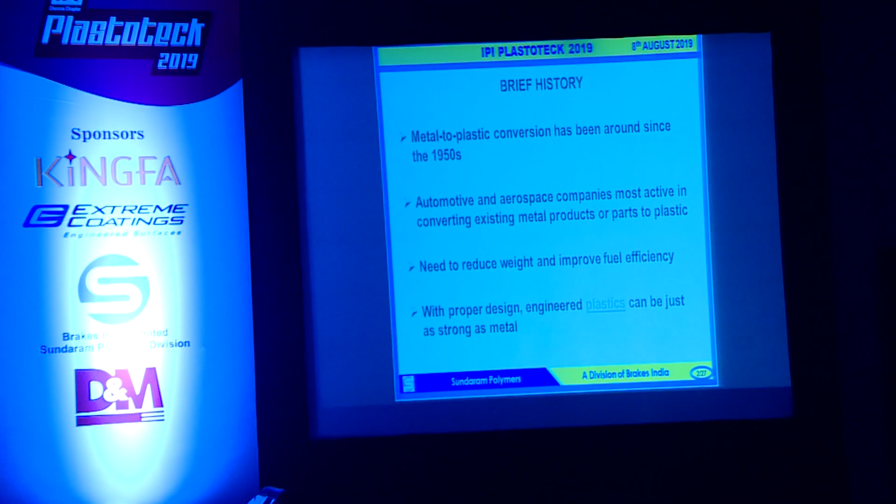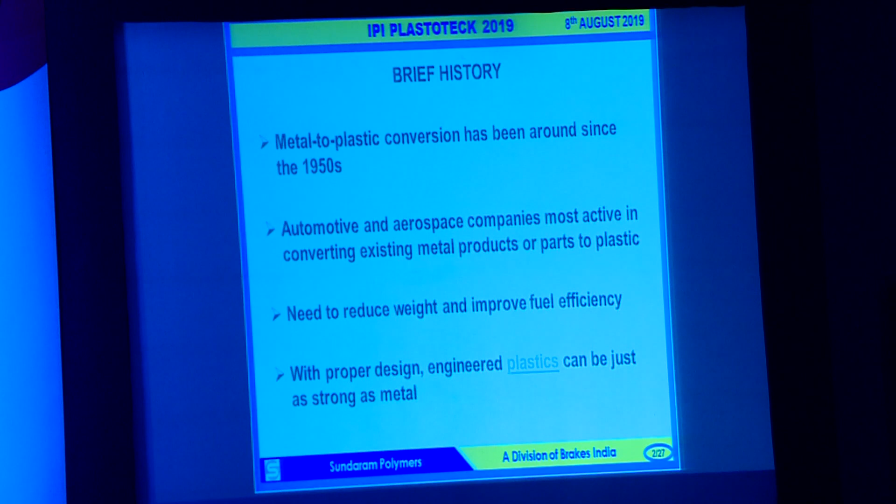A brief history. Metal to plastics conversion started quite a long time back, in the 1950s. The focus was mainly from automotive and aerospace companies. Aerospace companies use as much as about 25 to 30% of metal to plastic components, and they were the most active in converting metal products to plastics. The main drivers were to reduce weight and to improve fuel efficiency.

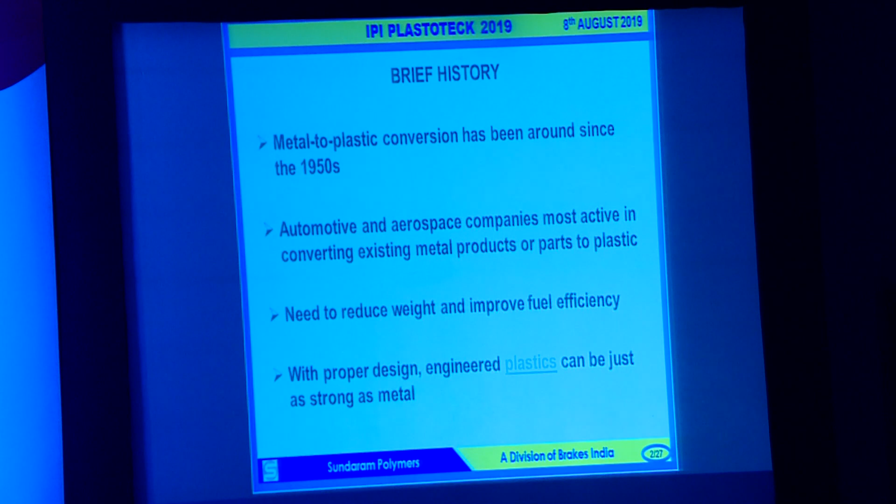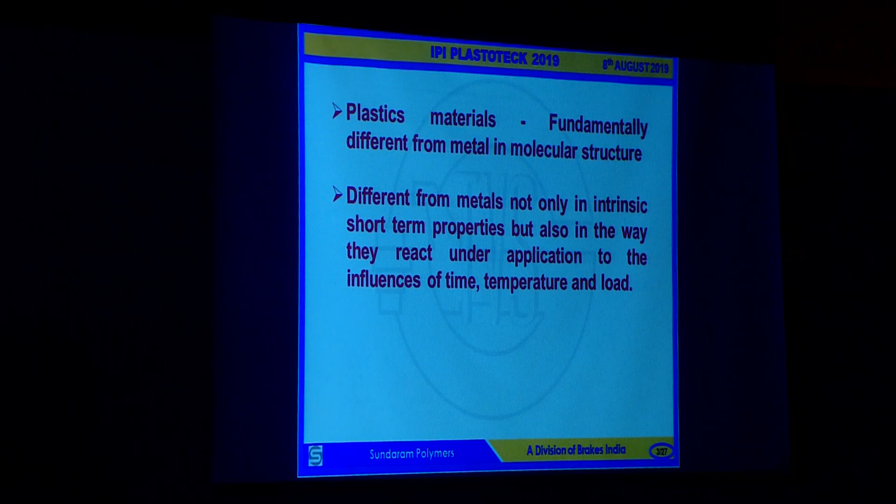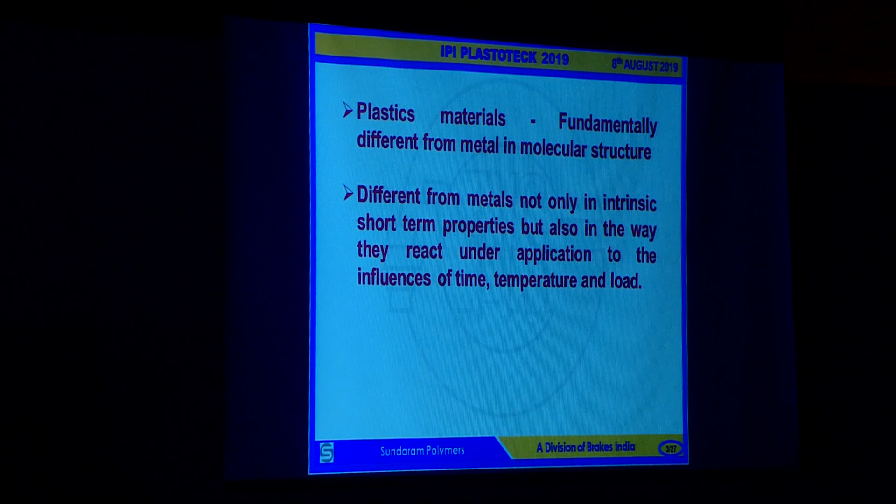With proper design and material selection, engineered plastics can be made to work as strong as metal. One fundamental thing that we need to understand before we take up this metal to plastics is that plastics are basically different from metal in terms of the molecular structure. You can't have an apple-to-apple comparison between metal and plastic. They're basically two different materials. This is something that we need to fundamentally understand before we go into any conversion.

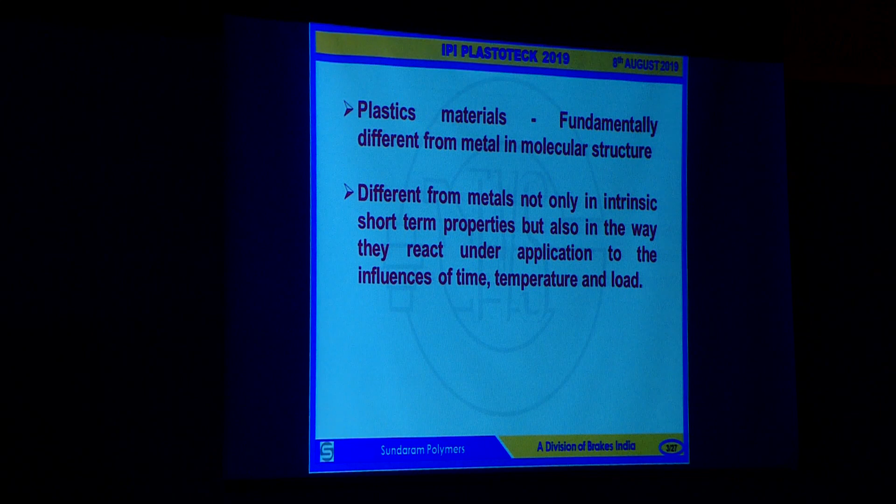And plastics differ from metals not only in the short-term properties, but also in the way they react under applications to influences of time, temperature, and load. It's not that they are inert for a long period of time, for long temperature cycles and for long loading cycles.

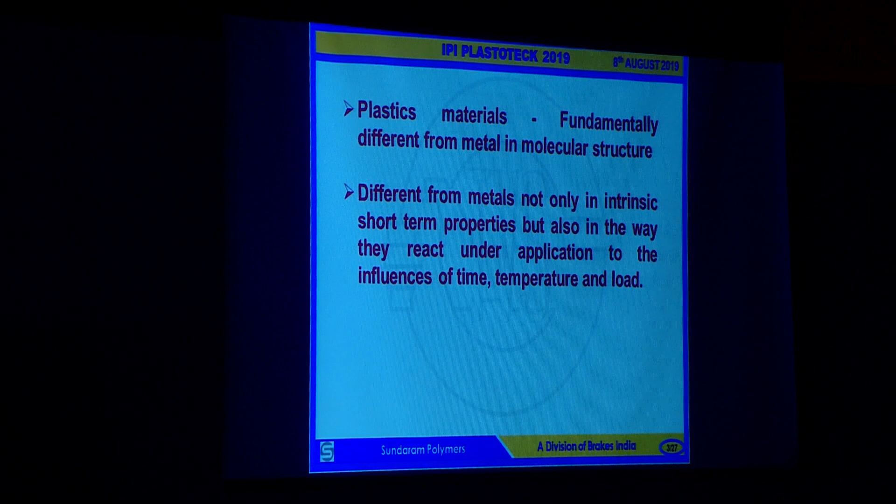The typical benefits you would have from such replacements: the foremost that people look for is weight reduction, because basically all plastics have lower densities compared to metals. Most of the plastics are well below 2, while metals start with aluminum at 2.7 and go up to steels at about 8. Fewer assembly operations can be achieved. Secondary finishing processes can be reduced substantially. Total system cost can be reduced.

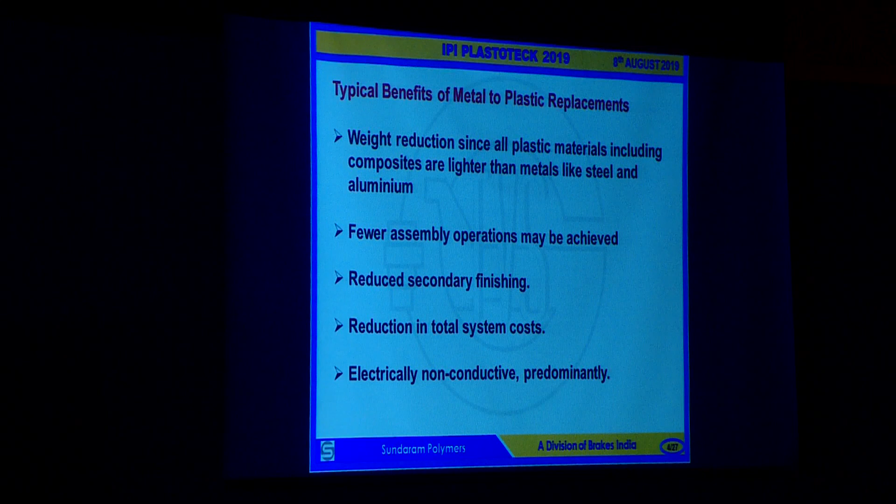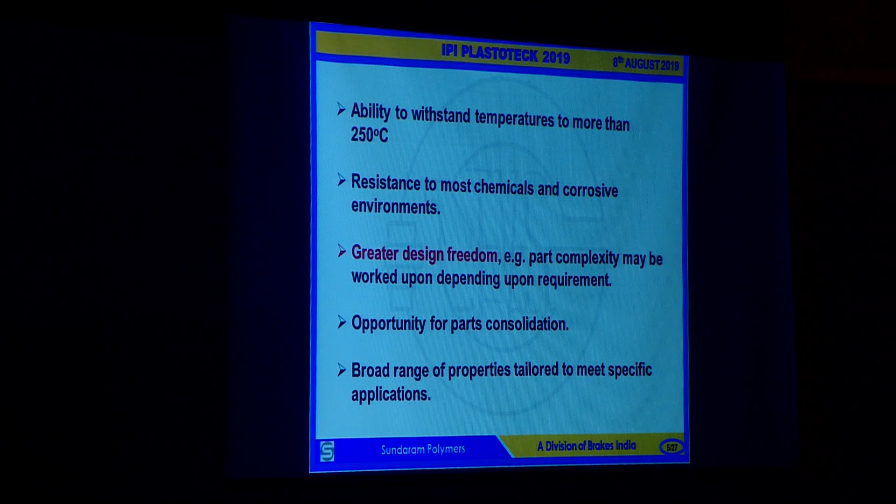Basically, plastics are electrically non-conductive. We have today plastics which can resist up to 250 degrees centigrade, which is well above the normal working temperature in an automotive application. And resistance to most chemicals and corrosive environments. We have greater design freedom with plastics. The part complexity can be designed depending on the requirements.

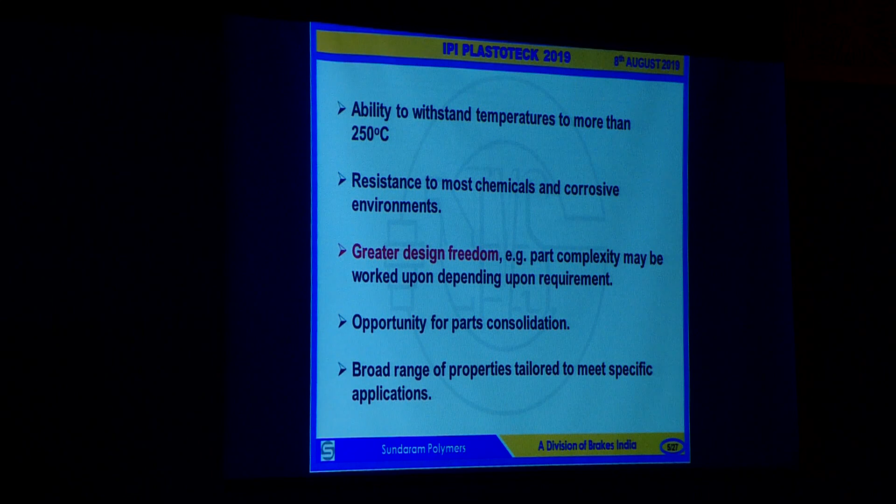Opportunities for parts consolidation: you may have multiple child parts in a metal assembly. That can be consolidated; we can reduce the number of child parts in a plastic assembly. With the wide variety of plastic materials available today in the market, you can have a very broad range of properties which can be tailor-made to suit specific requirements.

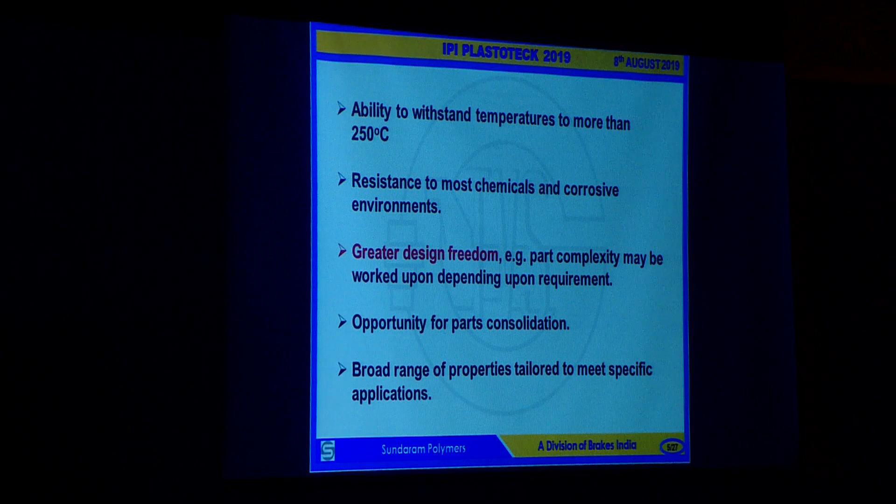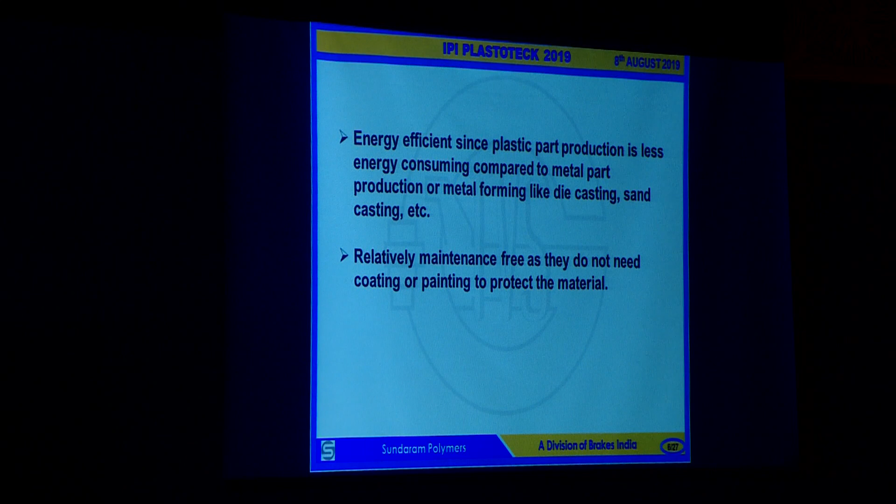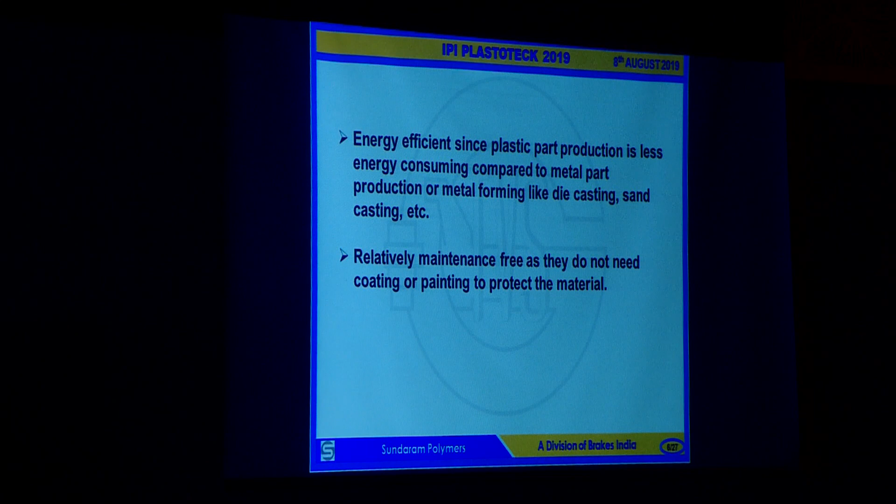Plastic processing is considered to be much more energy efficient compared to metal part production such as die casting or sand casting. In terms of maintenance, they have relatively very low maintenance costs. They do not require any coating, painting, etc. And today engineered colored plastics are playing a very vital role in automotive interiors, where they are replacing many metal parts which are painted.

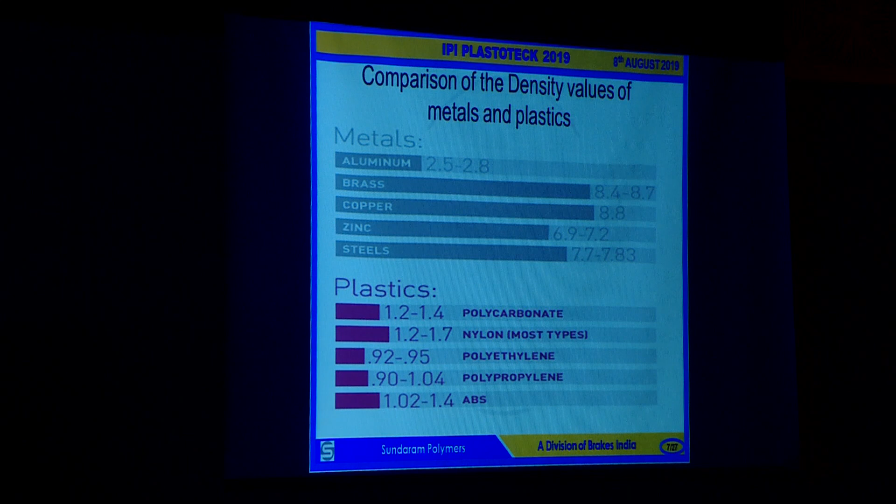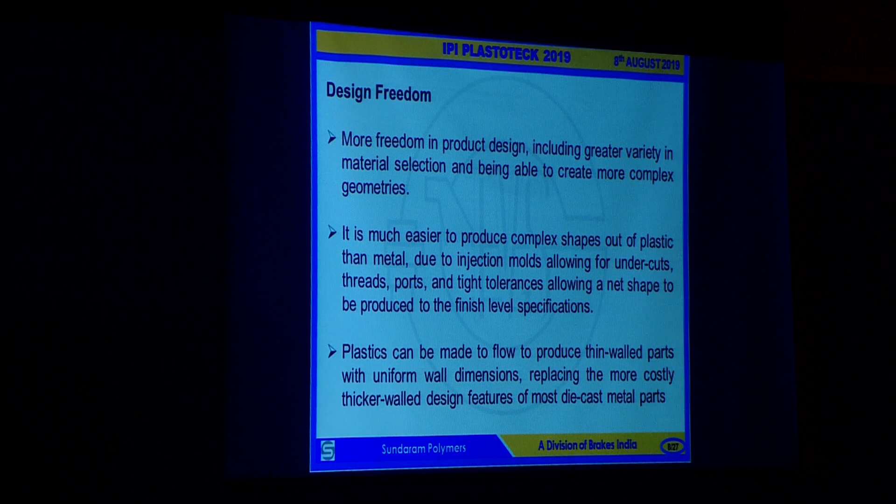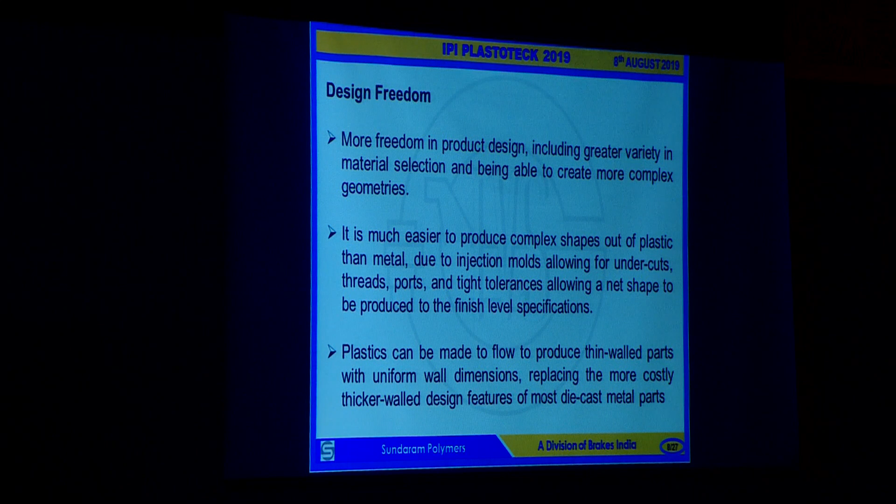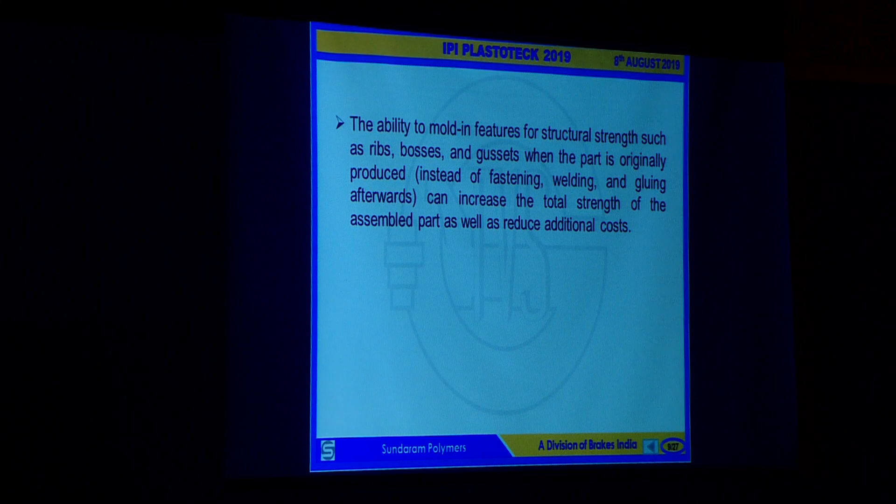Flow characteristics can be monitored and modified in such a way that you can have very low wall thickness products. And when you consolidate and make a plastic part replacement, you can have inbuilt structural strength for the plastic part by provision of ribs, bosses, and gussets, instead of having a very solid thick part. This can avoid many other processes such as fastening, welding or gluing, which are normally seen with the metal part, and this can increase the total strength of the full assembly.

The current trends in conversion mostly focus on reducing weight. It's one of the major ones, improving the strength, better corrosion resistance, consolidating multiple parts into one single plastic part, and mainly achieving the same tight tolerances with fewer secondary operations.

And the overall estimate is about 25 to 50% reduction, because otherwise the conversion really doesn't work. Customers are not happy, OEMs would not be happy. They would require fairly good cost savings. And this will be about 25 to 50% cost reduction in the plastic part.

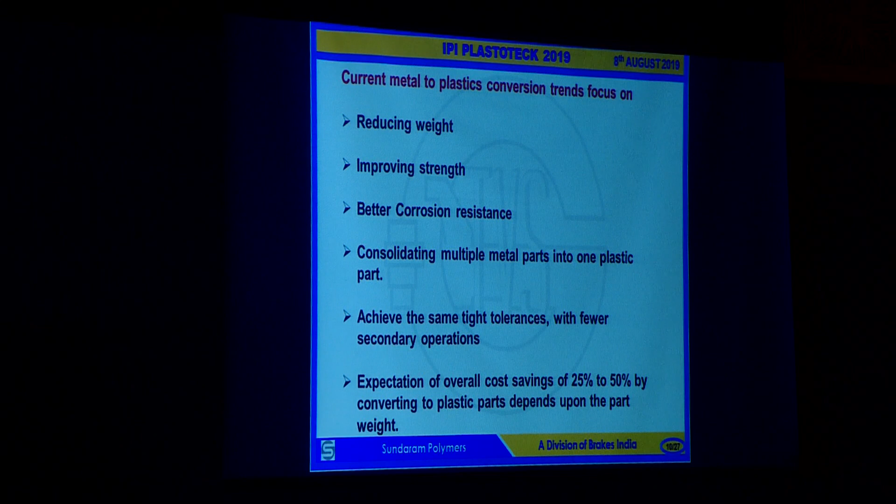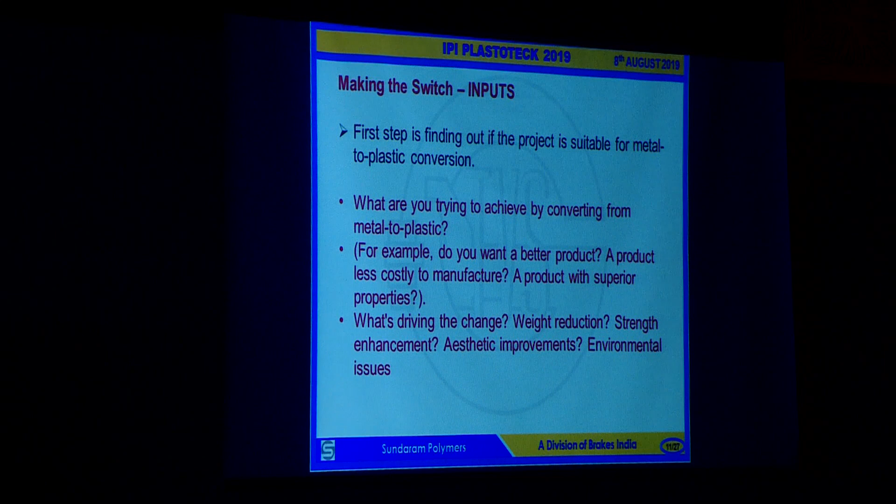When you do a switch, when you do a conversion from metal to plastic, what factors would you look into? First of all, you have to evaluate whether it's really viable, whether it's really suitable for going into such a conversion. So what do you achieve by doing this? It's very difficult to blindly go into any metal to plastic conversion and then finally come back and say, no, it's not workable. So you should look at things like whether you want a better part, which is less costly to manufacture, with some more superior characteristics, added advantages over the conventional metal.

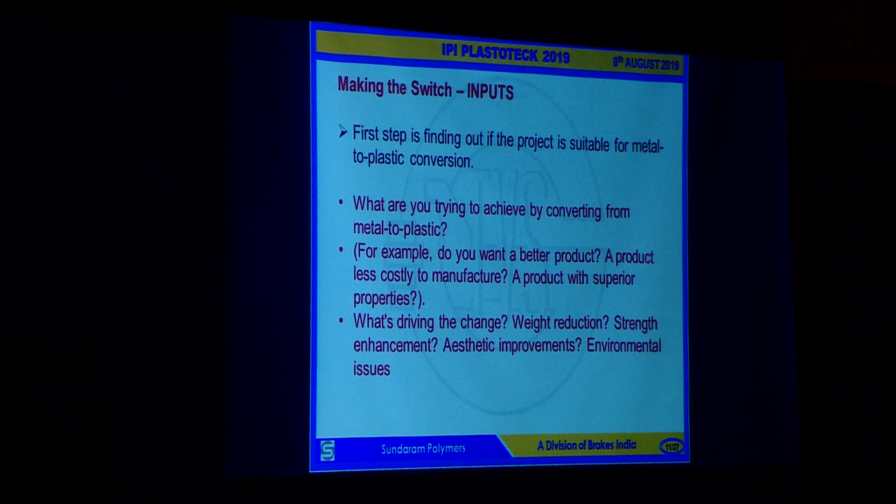What are the change drivers: weight, strength, aesthetics, or environmental issues? These are some of the driving factors for the change which need to be considered. We also need to look at the end-use applications, environmental conditions, and last but not the least, the cost benefit, the economic feasibility of conversion. Do a cost benefit analysis for understanding whether it's really beneficial to change over to a plastic.

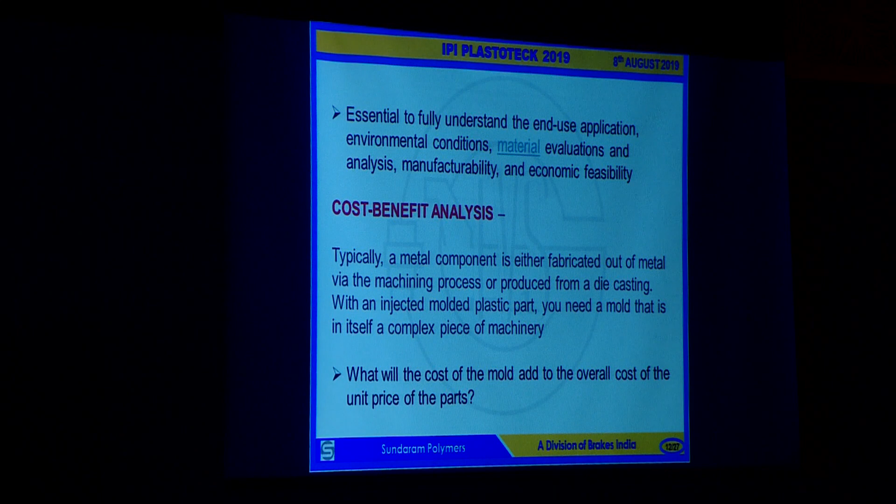One is the material you use, and then the production process. If you do injection molding, you do require a mold. It could be a simple mold, it could be a complex mold, depending on the part geometry. And also you need the machinery. This is also expensive. Will it add to the overall cost of the plastic part? Plastic material prices sometimes can go haywire, so we need to factor that in also.

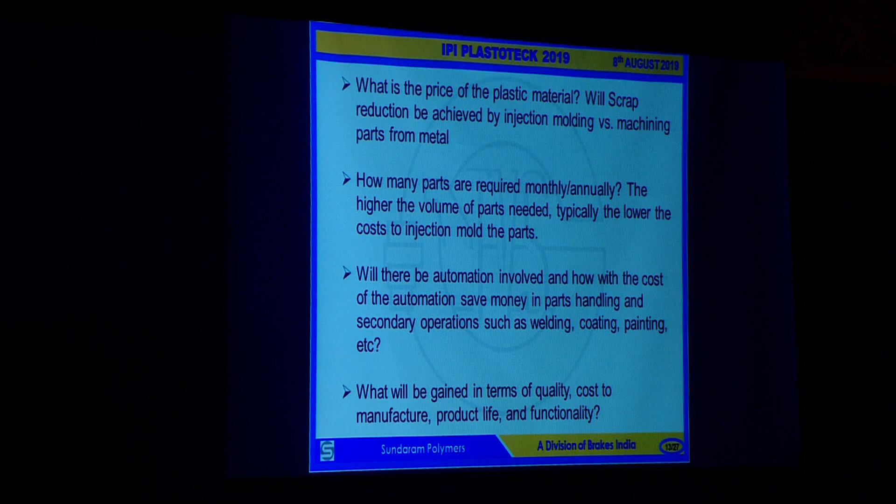How much scrap will you save if you do a metal to plastic conversion? Is it by a cold feed system or a hot runner system? Can you save on the feed system cost also, depending on the plastic you choose? The volumes: very small volumes really do not give you a good value addition. What sort of volumes are you looking at?

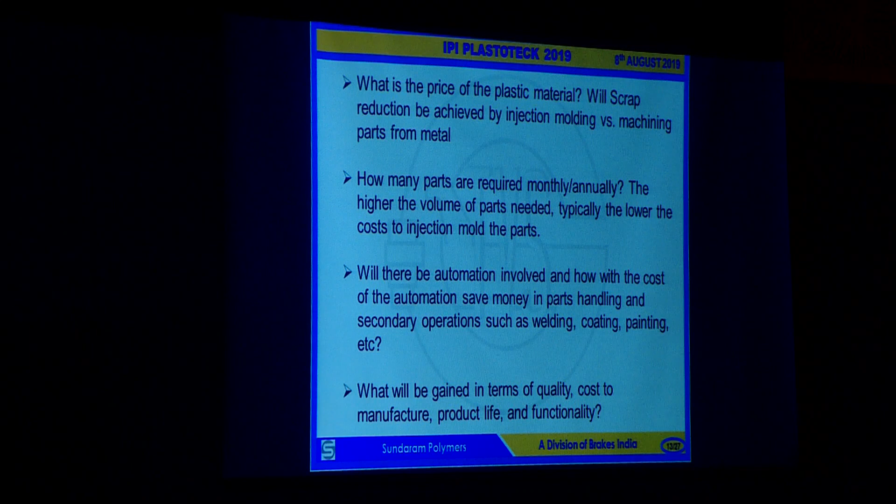Another factor which people really look at today is how the process can be automated. Plastic molding is a very fast process with cycle times of less than a minute. So how can you automate the entire system so that you have better cost advantage? And in terms of overall quality, cost to manufacture, product life, and functionality, what is the total gain that you get from converting from metal to plastic?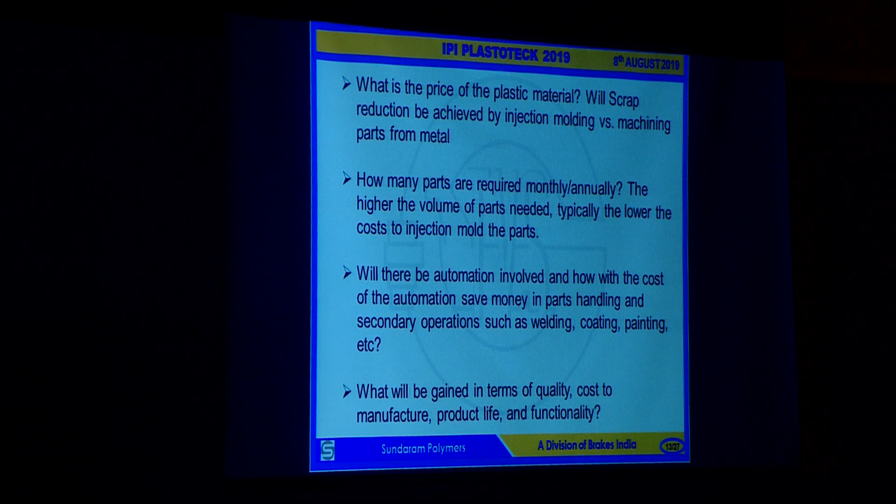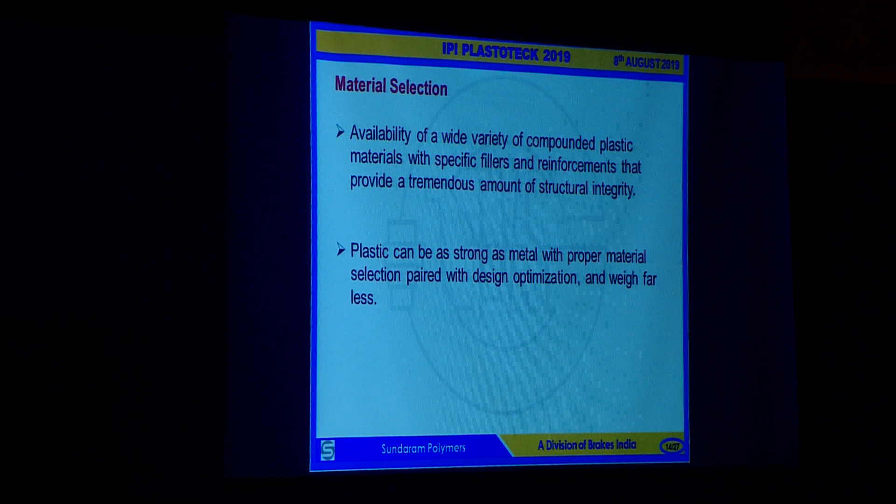In terms of material selection, which is one of the key important aspects of this conversion process: today you have a wide variety of compounds, you have plain polymers, you have polymers from the reactor, polymers which can be compounded with specific fillers, reinforcements, additives. All this can give you a great amount of structural integrity in the plastic part.

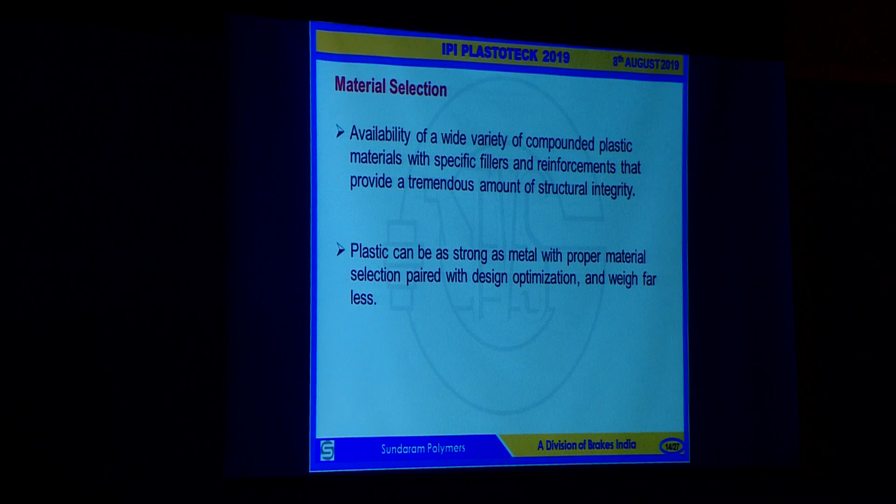So choosing the right plastic also takes some amount of time, a lot of study, a lot of deep insight into understanding the properties of the plastic, understanding their long-term behavior, and you have to choose the right plastic to make it happen.

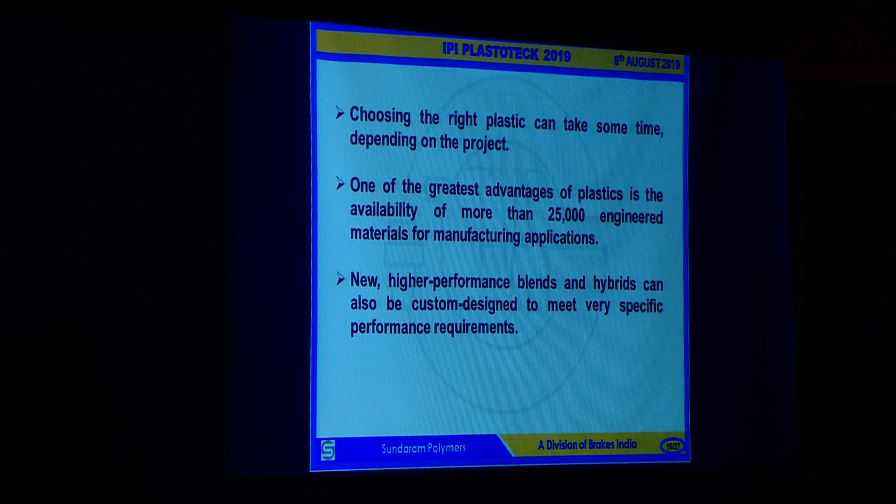And today, from the plastic library, you have more than 25 to 30,000 engineered polymers, which consist of unfilled, filled, and modified polymers. So you have a wide range of materials based on their temperature, continuous use temperature, load-bearing characteristics, etc. to choose from. And you also have a lot of polymer alloys. Polymer alloys are gaining a lot of ground today in metal replacement. And these polymer alloys can be tailor-made to suit the requirements of the part.

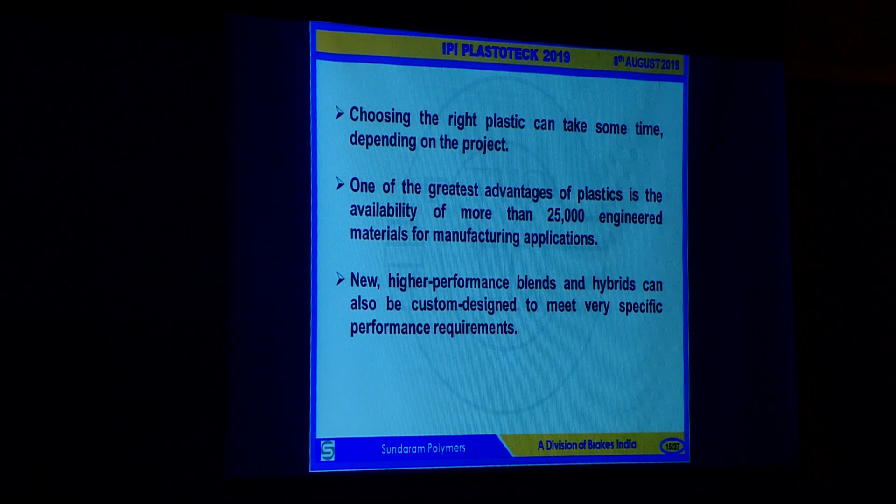Key considerations would include whether you require a crystalline or amorphous polymer, depending on the type of application, chemical resistance, impact, flow, ease of processing. What type of additives would you require to make the plastic work as a suitable replacement? It should have high strength, stiffness, temperature performance, appearance, and also be easy for packaging, and last but not the least, cost.

The plastic should also be easy to incorporate fillers like carbon or stainless steel fillers, specifically for conductive or EMI shielding applications. For friction and wear properties, you can use specific lubricants which can improve the wear characteristics.

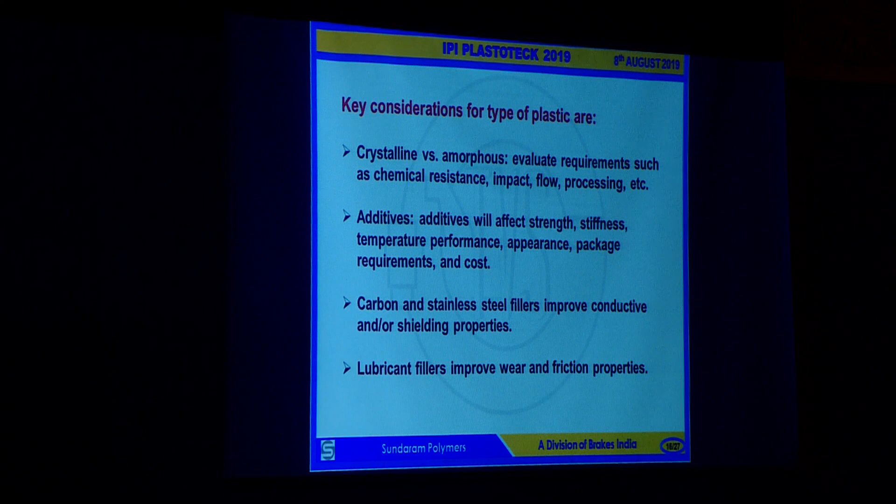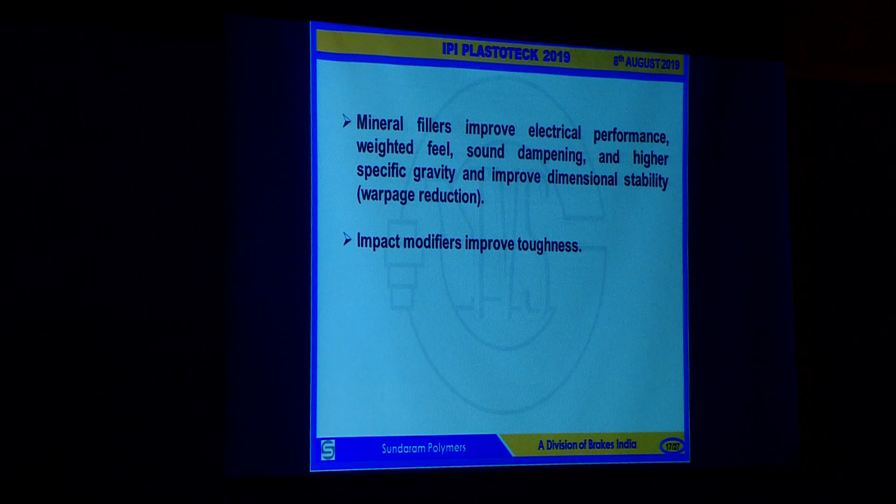Most of you would know that mineral fillers are normally added to reduce cost. But they can also improve electrical performance, weighted feel, sound dampening, and improve dimensional warpage reduction, etc. Rubbers or elastomers would improve the toughness of the material.

The design of the plastic is a chapter by itself. In the time provided I would not be able to discuss too much on that, but I'll just touch upon this. The design engineer plays a very pivotal role in designing the plastic part. So he must be able to accurately predict what would be the real environment in which the plastic part would be subjected to.

So chemical exposure, temperature resistance, and also he should have a fairly good idea on understanding what would be the worst case scenarios, under what extreme conditions the plastic part would be subjected. And today we have many softwares, FEM tools which can clearly help us to understand what would be the ability of the plastic to meet the requirement without even any major investment in tooling or even material.

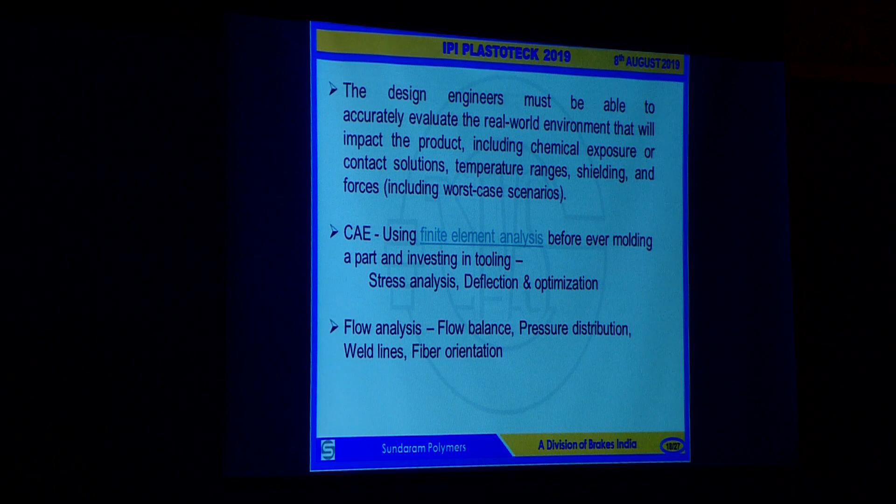Ultimately, it requires a very close collaborative approach between a part engineer, a materials engineer, mold designer, and the molder to make a successful metal to plastic conversion. A silo approach would be a total failure in this case. I can very clearly tell you this. It would require a very, very close collaborative and very integrated approach to achieve this.

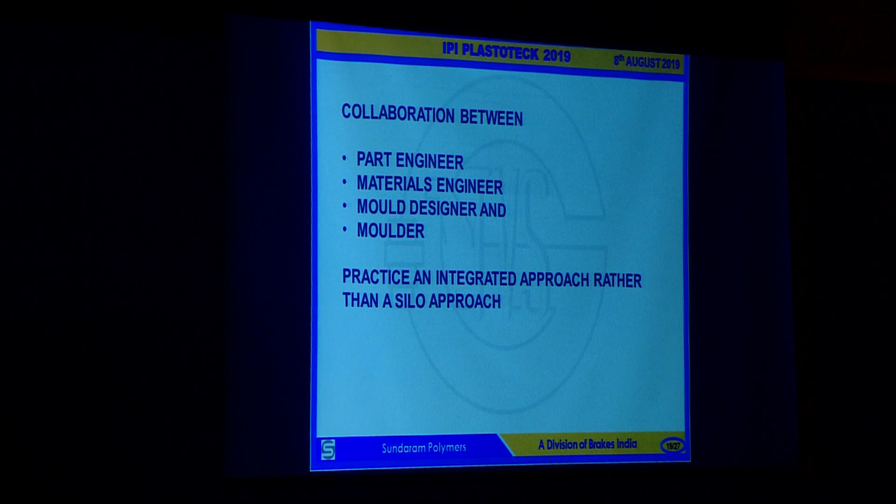Summarizing this, the inputs would be the technical data on the part, the machine software, a team of skilled and experienced engineers, tools for comparing cost and energy effectiveness. The process would involve concept stage to production stage, choosing the plastic raw material, plastic design modification, analysis, simulation, prototype development, mold development, trials, testing and correction, and finally part optimization and production. With these inputs and the process involved, the output would be a successful replacement of a metal with plastic.

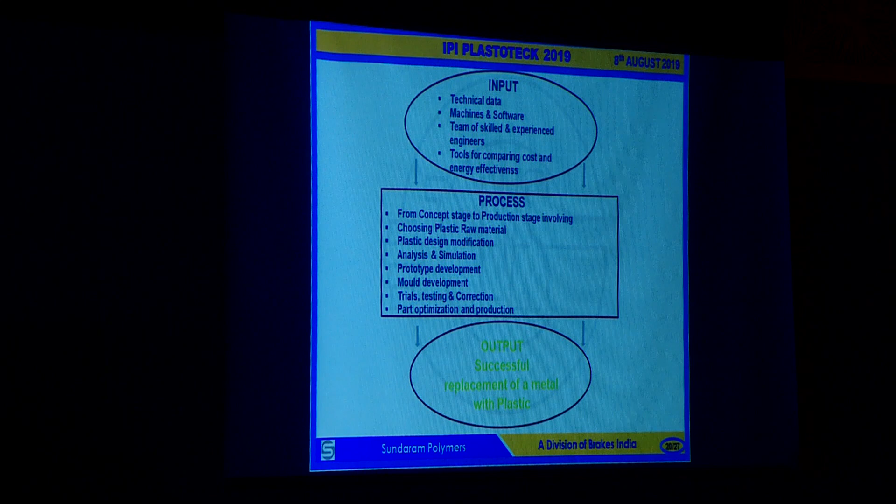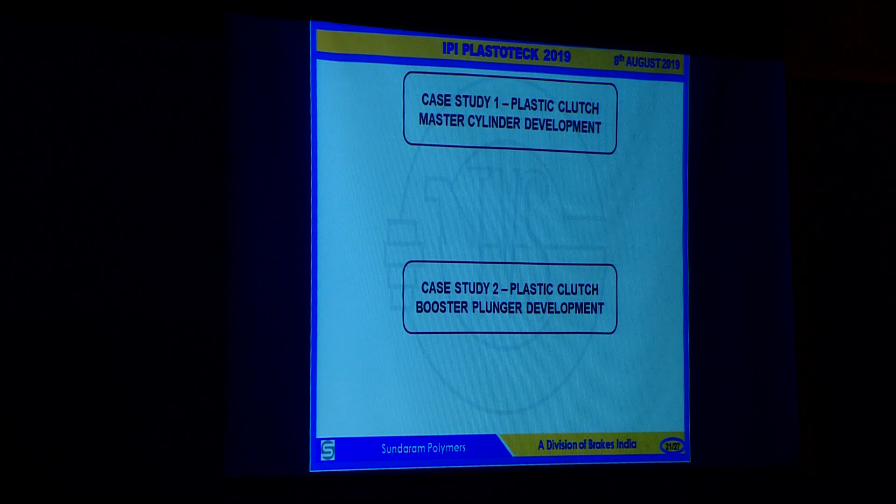I will now take you through two case studies quickly, which we have done along with our Brakes India Advanced Product Development Engineering team on two very successful metal to plastic replacements. One is a clutch master cylinder. This is a metal to plastic conversion. It's a clutch master cylinder housing. The part has been conventionally made in cast iron and maybe also in aluminum. And this has been converted to a plastic.

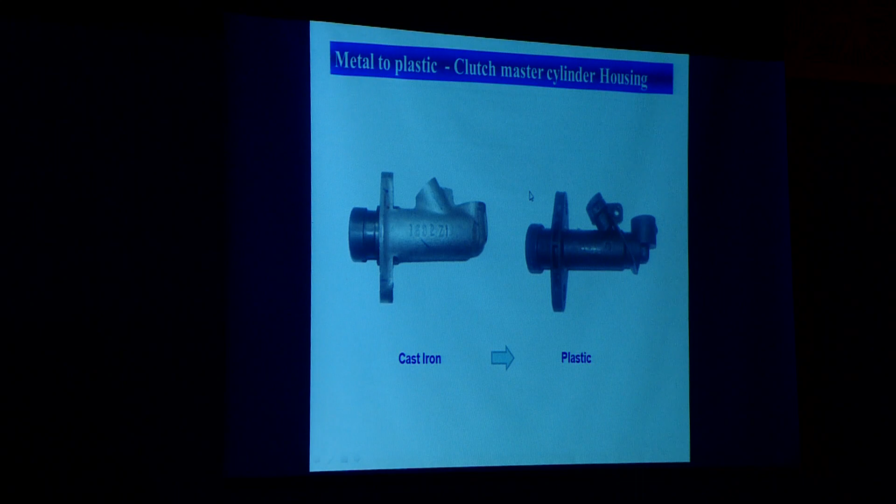Most of you would be aware of the clutch master cylinder working principle. So basically, when you press the clutch pedal, the push rod contacts the plunger and pushes it inside the bore of the cylinder. After about 1 mm movement, the valve seal closes the inlet port to the supply tank. As the plunger continues to move inside the bore, fluid is forced through the Bundy pipeline to the slave cylinder.

And when the clutch pedal is released, the plunger moves back with the return of the fluid from the slave cylinder. We are only talking about the master cylinder. There's another slave cylinder also. This is the rough construction of a clutch master cylinder.

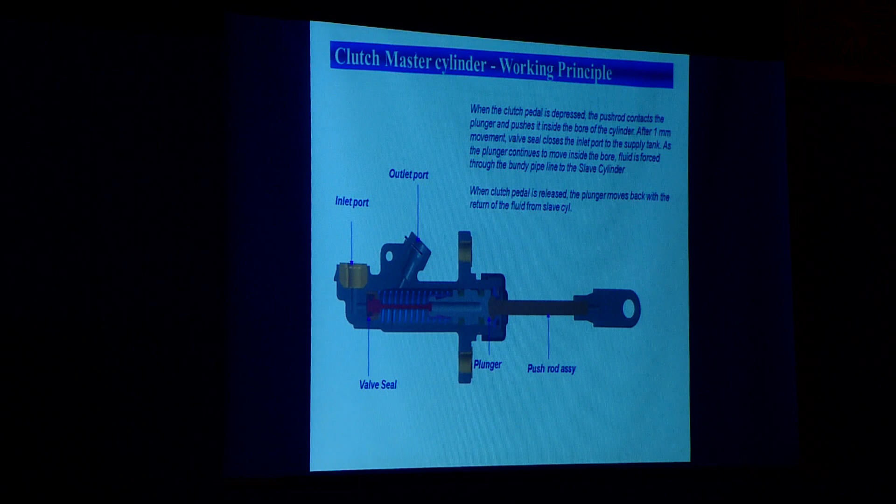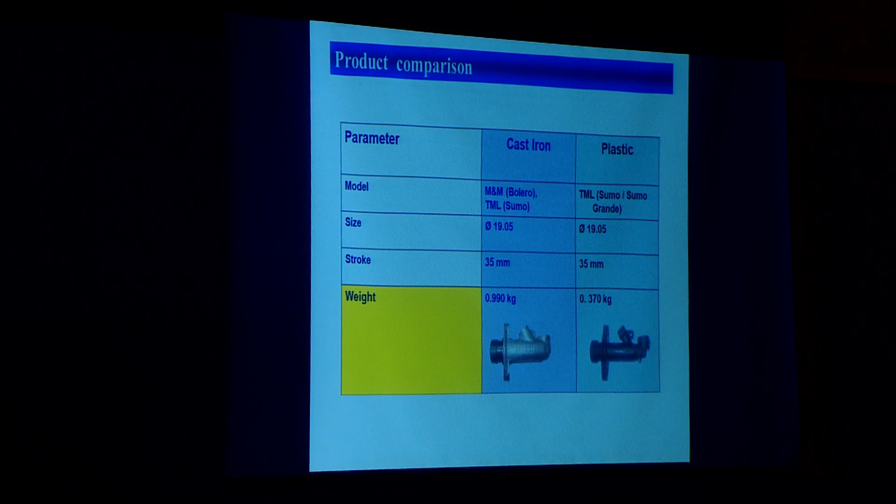This particular part which we had taken was being supplied to M&M and to TML. The bore size was 19.05 mm dia. The stroke length was 35 mm. And the weight was almost about 1 kg. The target was to reduce it at least by 50% initially.

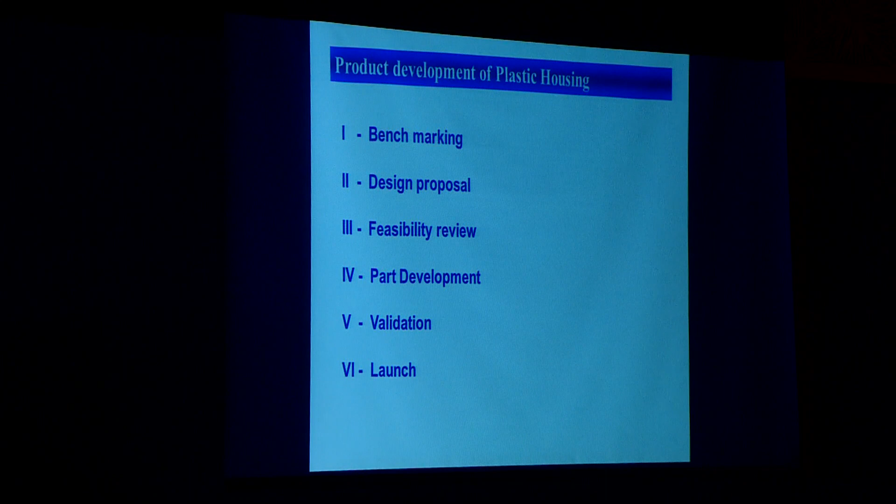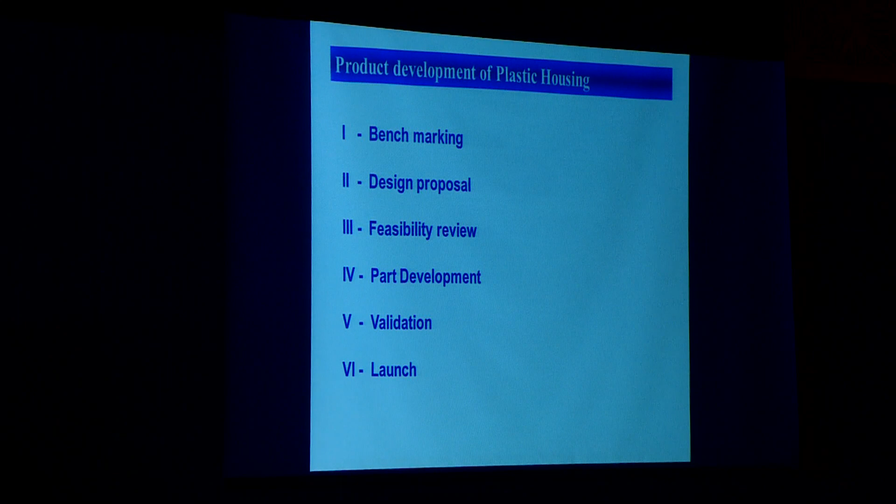The steps in this product development: first, benchmarking. Fortunately, in this case, we had some products which were in the market. Then design proposal, feasibility review, part development, validation, and launch. We identified certain products which were of similar design or maybe function, made by other suppliers.

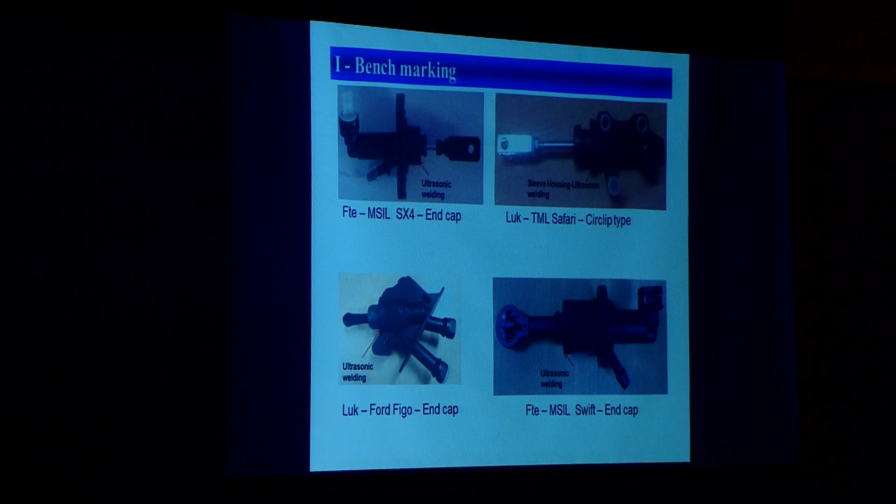The second stage was the design proposal. The part requirements were identified clearly at this stage. It should be suitable for very high temperature. Continuous use temperature was fixed at about 140 degrees centigrade. It should have very good brake fluid compatibility, very good dimensional stability, and a very good surface finish, especially inside the bore.

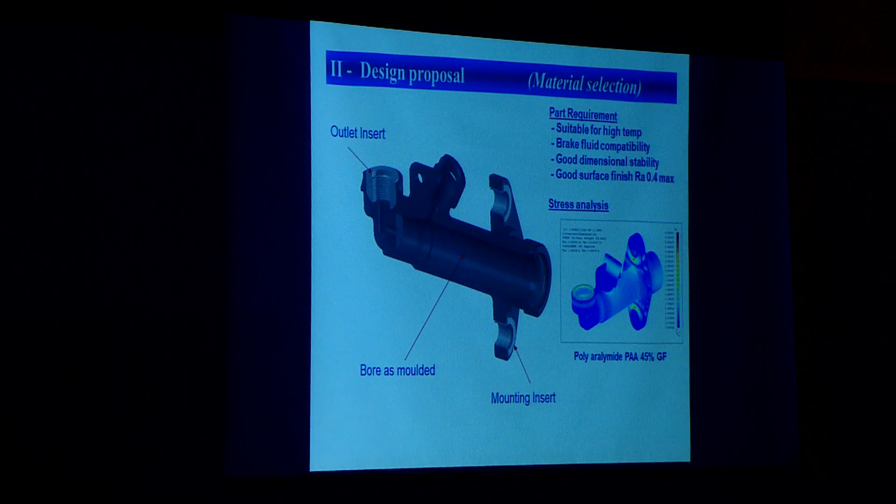And this surface finish should be attained as molded, not by any secondary operation. It should be as molded. This was a very major challenge. And we should also have built-in inserts. Inserts cannot be added as a secondary process. The insert should be as molded. So it was sort of an insert molding. After a lot of FEA study, we finally arrived at the material. The material was polyarylamide, here it's 45% glass filled material.

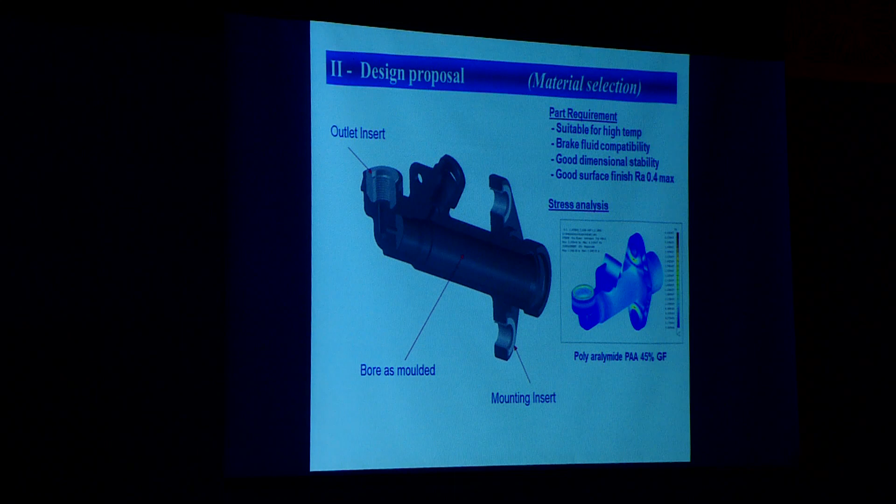We looked at how many parts could be consolidated in the whole assembly, and what could be removed, what could be built in along with the plastic part when we do the injection molding. There are also certain other metal parts in this, so the plastic housing had to accommodate all these parts.

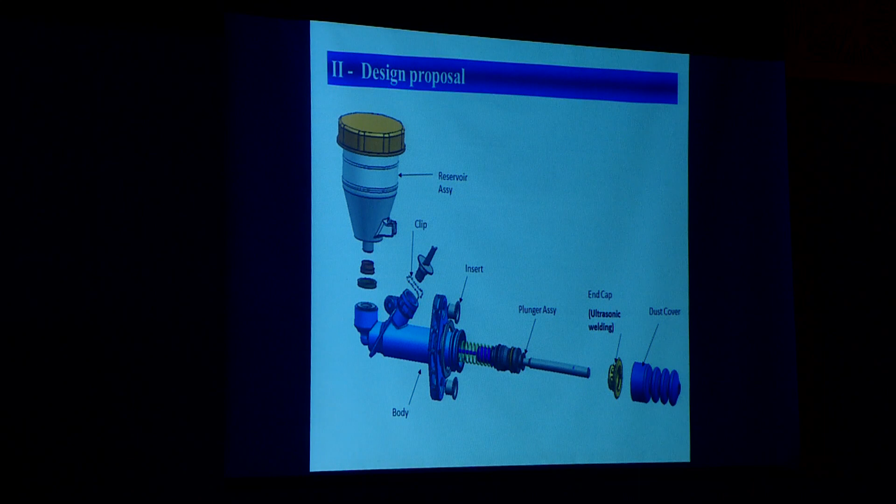The construction of the mold. And here we learned about the use of laser fusing, conformal cooling. The bore had to be with very accurate temperature control. Otherwise, it was very difficult to achieve the surface finish. The surface finish is very critical for the plunger assembly movement. It had to have a surface roughness of about 0.4 Ra.

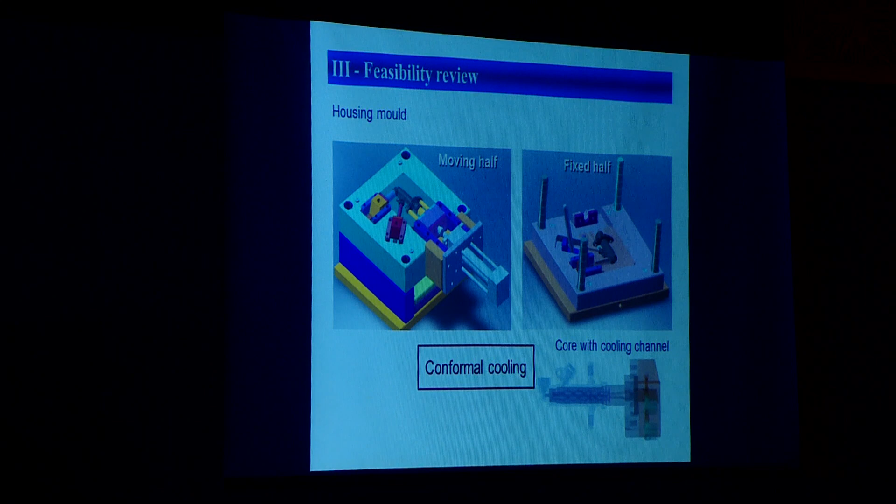Then we started with the part development. First, we went through the mold flow analysis. We were able to do the dimensional study. We identified which is the best gate design for this part. How would the filling pattern vary if any other alternate gate designs were provided? The shrinkage, material shrinkage and the part shrinkage. Process parameters, what would be the best process parameters that would be required to mold this part?

Once the part is molded, then how do we inspect this part? So we had to use special gauges for this, not the conventional ones, the special electronic plug gauge. Then a boroscope had to be used to check whether there were any problems or defects in the bore. Any scratch mark in the bore or any other defect in the bore could very seriously affect the movement of the plunger and can lead to a failure of the part.

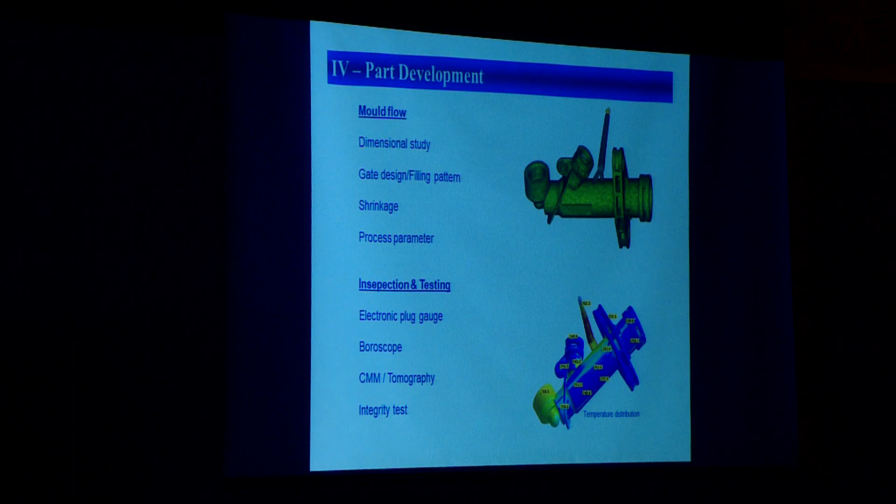We also had to do tomography to understand whether there were any internal cracks inside the part, any porosity inside the part, because this can also have a very catastrophic effect on the part when it goes into the field. And finally, an integrity test to find out what would be the actual burst strength of this part, under what conditions it would withstand, what levels it would be able to withstand.

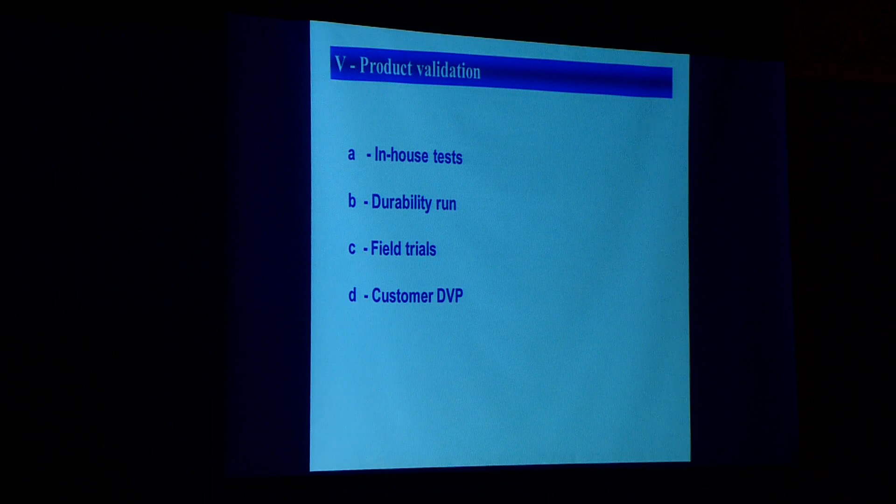So with all these tests, then we had the product validation: in-house tests were conducted, durability run with the support of the OEM, field trials, customer DVP. In terms of in-house, the part had to undergo an ambient endurance of 1 million cycles, heat endurance at 70 degrees for 250,000 cycles, heat endurance at 120 degrees centigrade for 70,000 cycles, cold endurance test at minus 40 degrees centigrade, burst strength test, minimum 100 bar, vibration, ambient endurance, and life durability tests.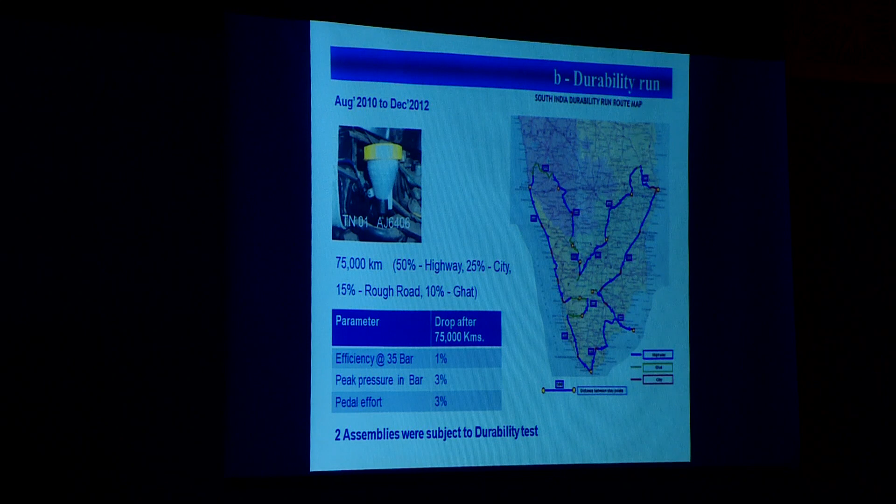Overall, it went through all these tests successfully, and we were finally able to launch the product in January 2015, and it was accepted by the OEM Tata Motors also for Tata Sumo vehicles, Tata Sumo Grand vehicles.

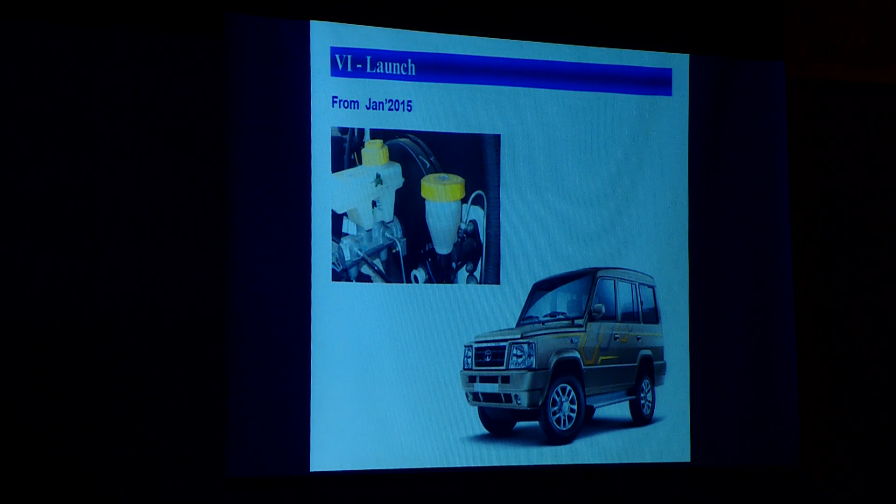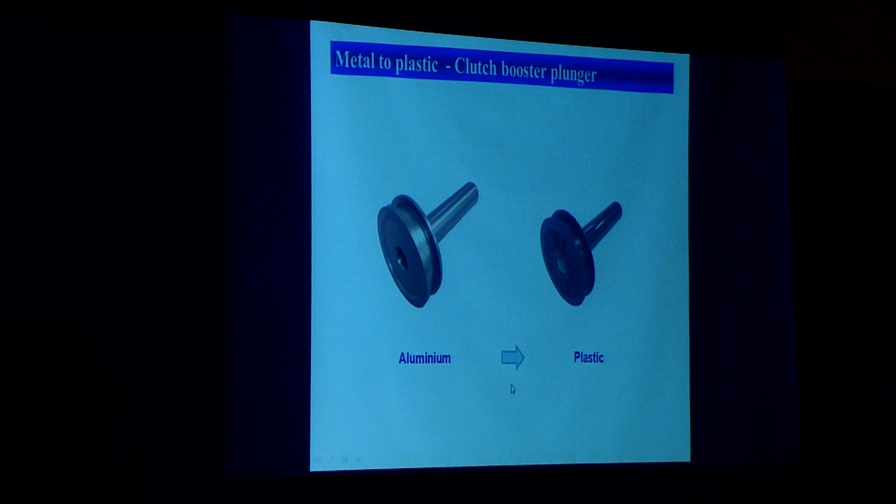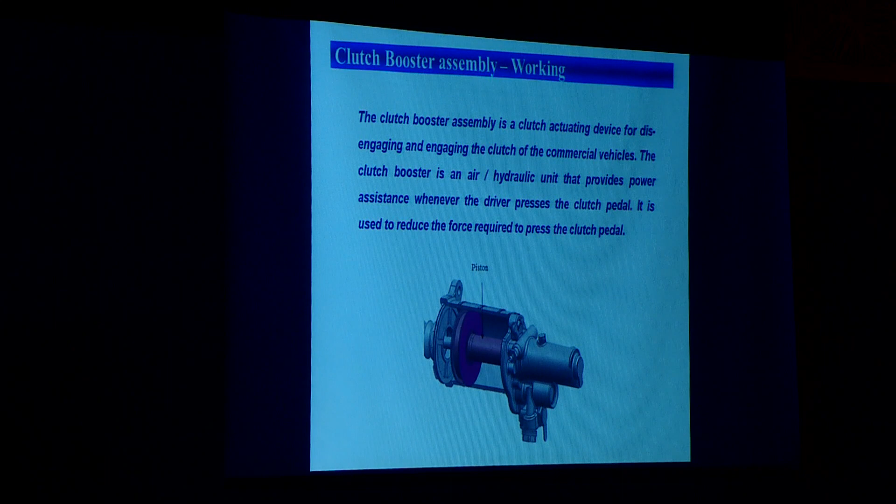Another quick one is a plastic clutch booster. This is again an aluminum part. This was converted into a plastic. This is a part of an assembly which is a clutch actuating device for disengaging and engaging the clutch in a commercial vehicle. This booster is a part of an air and hydraulic unit that provides power assistance whenever the driver presses the clutch pedal. So basically it is utilized to reduce the effort of the driver.

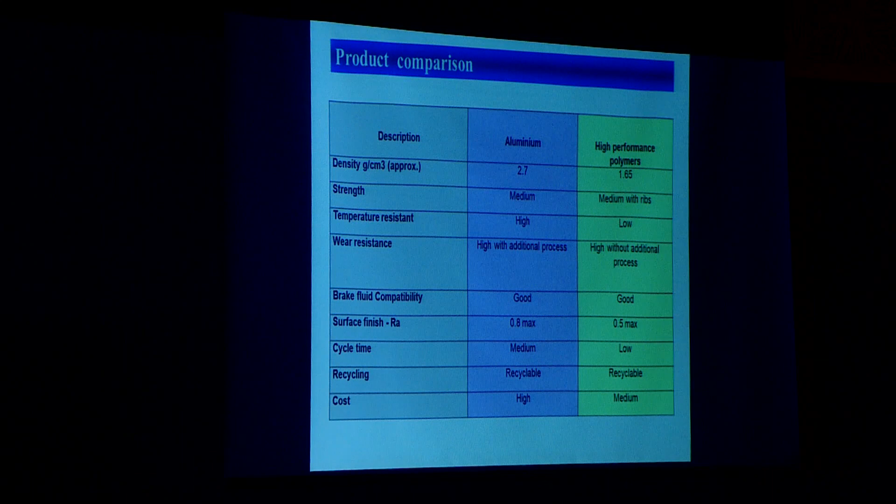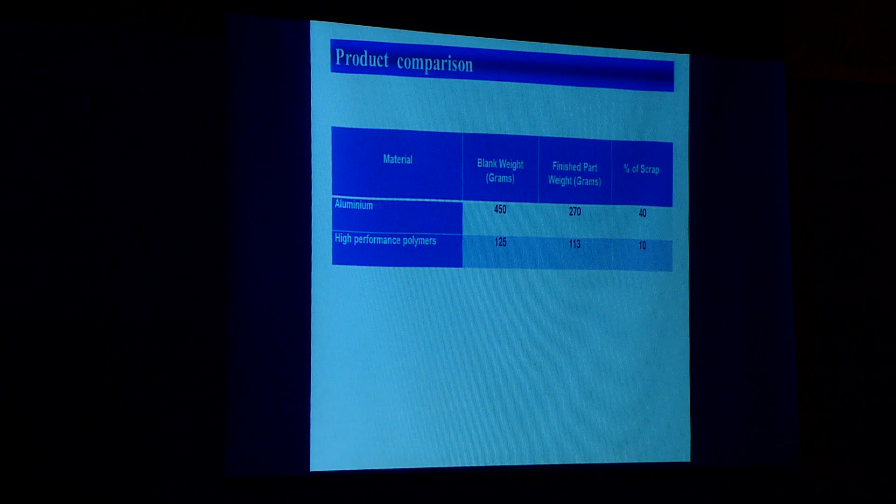So again, the product comparisons were made with aluminum, identifying the high performance polymers: density, strength, temperature resistance, wear resistance, brake fluid compatibility, surface finish, cycle time, etc. In terms of blank weight, the aluminum was 450 grams, finished product weight was 270 grams, while high performance polymer nylons were chosen for this. The finished product weight was 113 grams. There's a substantial cost reduction, substantial material weight reduction in this.

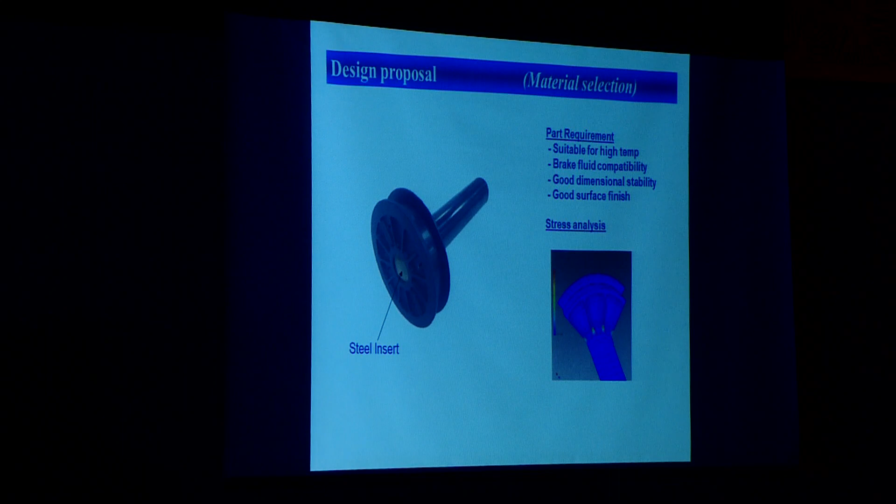Again, required for high temperature, fluid compatibility, dimension stability, and surface finish. A similar process was also done here. And finally, the product was launched from January 2018. This is mainly for commercial vehicles.

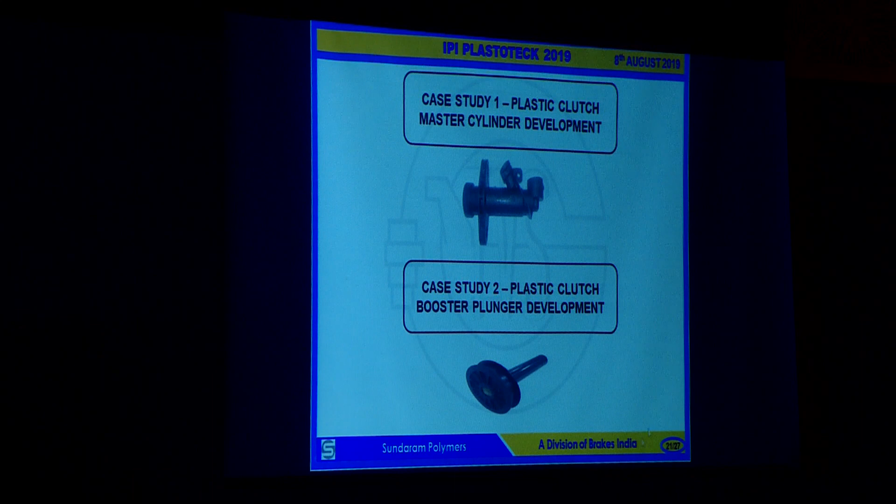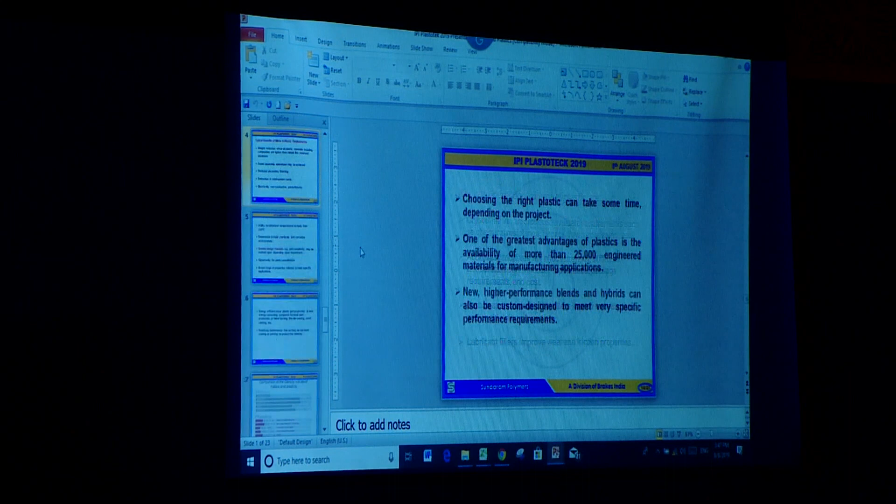So what these two projects helped us to understand, apart from this, there were many more projects on which we were able to horizontally deploy. And Sundaram Polymers, part of Brakes India, today is able to offer its technology and services mainly for developing art-to-part solutions under a single umbrella. So our aim is to provide the customer a complete solution for any drawing or any design that he gives, which is the input from him, for a metal to plastic conversion solution.